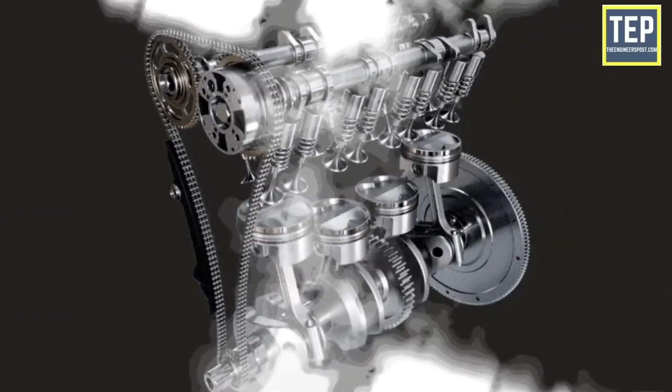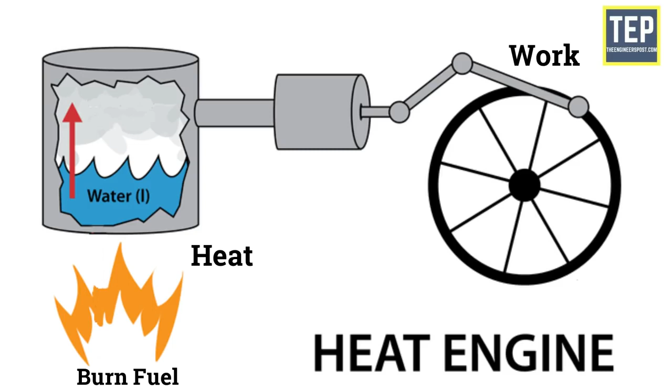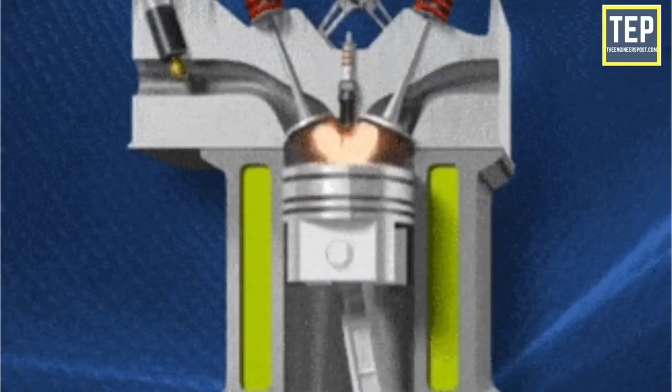An engine is a machine designed to convert one form of energy into mechanical energy. Heat engines burn fuel to create heat, which is then used to do work. It is a complex machine built to convert heat from burning gas into the force that turns the wheels. The chain of reactions that achieve that objective is set in motion by a spark, which ignites a mixture of

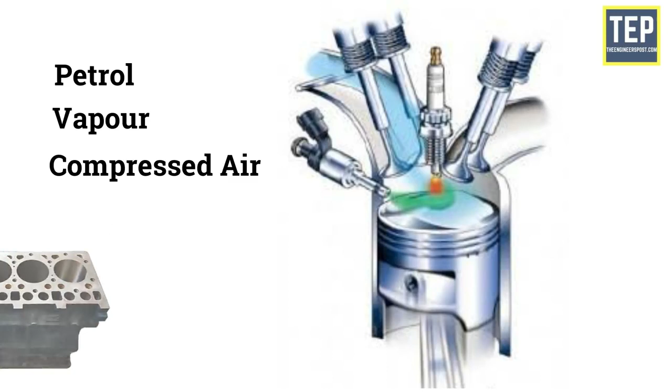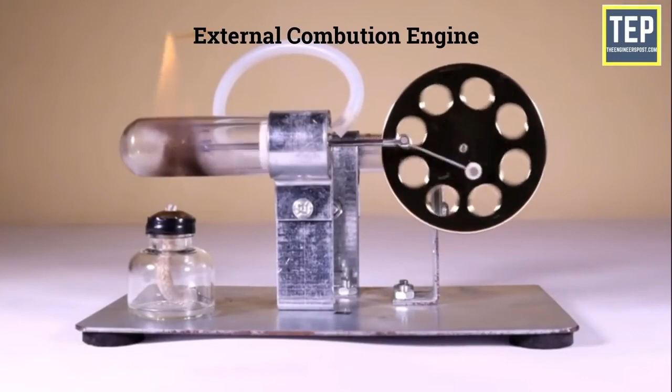petrol vapor and compressed air inside a momentarily sealed cylinder and causes it to burn rapidly. The engine has two types: one is the internal combustion engine, and another is the external combustion engine. The internal combustion engine is those heat engines that burn their fuel inside the engine cylinder. External combustion engines are those heat engines that burn their fuel outside the cylinder.

The engine is one of the most essential parts of the automobile industries, or we can also say that the engine is the heart of an automobile.

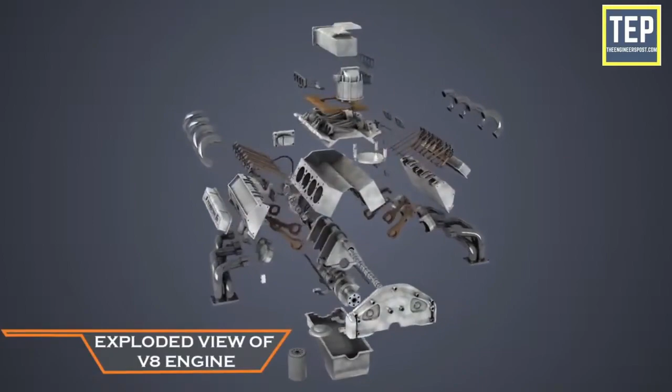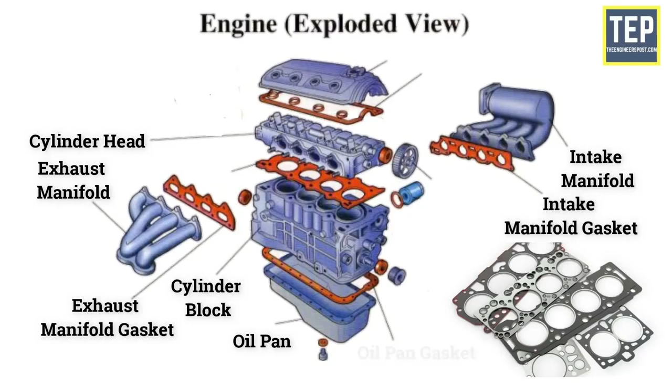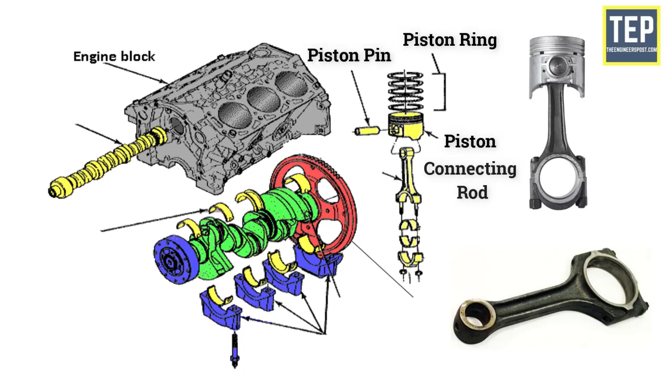The main parts of a car engine are cylinder block, cylinder head, oil pan, manifolds, gasket, and piston, piston ring, piston pin, connecting rod, crankshaft, camshaft, flywheels, rod bearing, main bearings, and bearing caps.

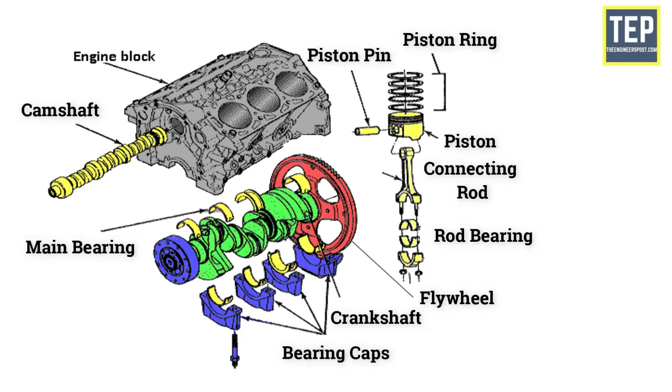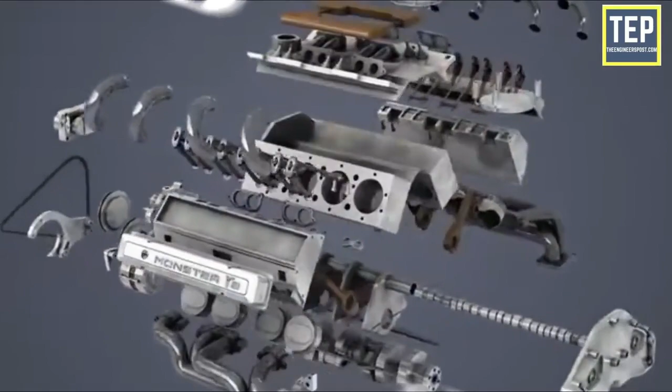Now let's take a look at each engine part in detail, starting with the cylinder block. It is the basic framework for the engine and one of the main parts of an engine. A cylinder block consists of three parts: the cylinder in which the piston slides up and down, the port or opening for the valves, and the passages for the flow of cooling water.

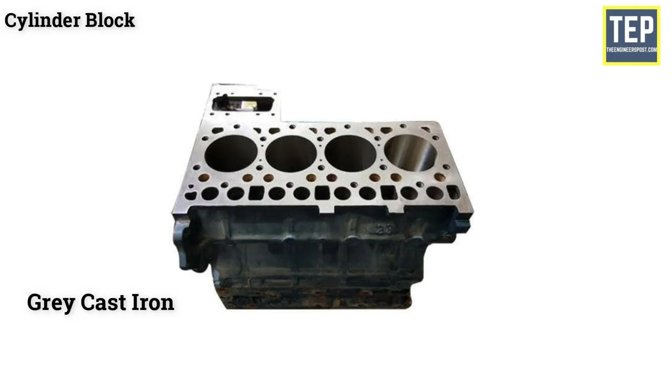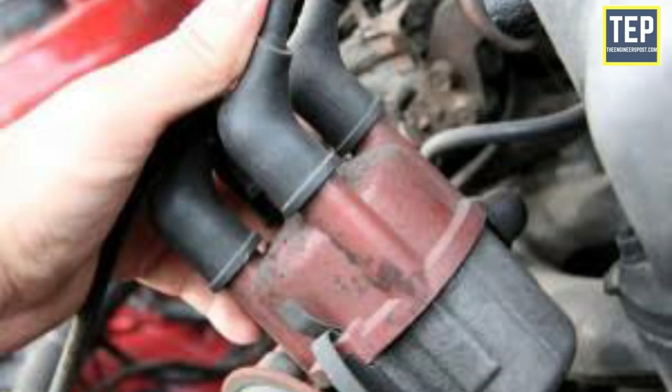The cylinder block is usually made of gray cast iron or aluminium and its alloys, while the crankcase is fixed to its bottom. Apart from these, other parts like timing gear, water pump, ignition distributor, flywheel, and fuel pump are also attached to it.

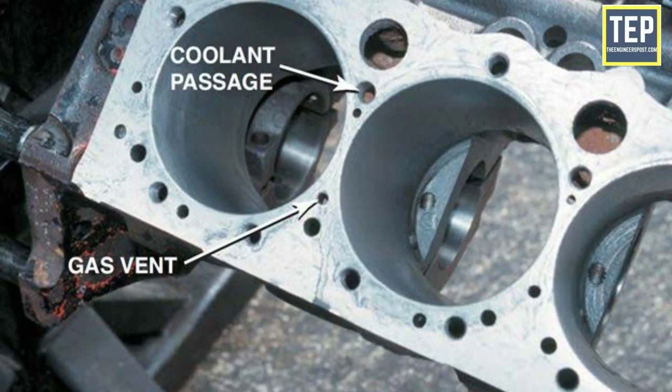Coolant passages are provided in the cylinder walls for the circulation of cooling water. The cylinder block also carries lubrication oil to various components through drilled passages, which are called oil galleries.

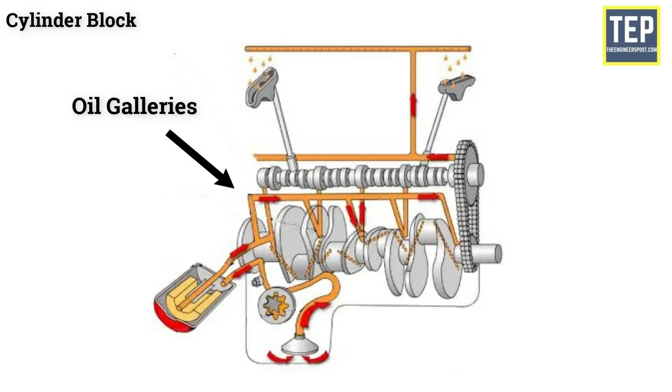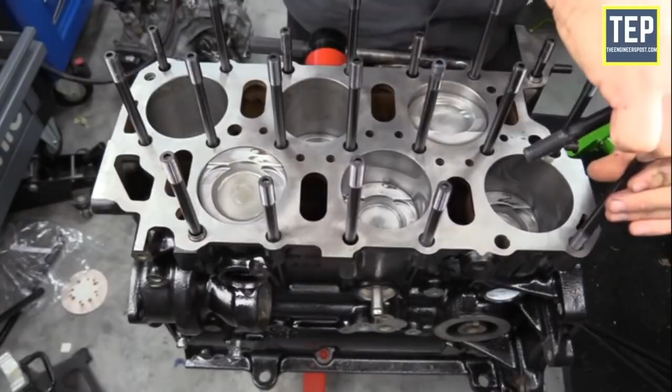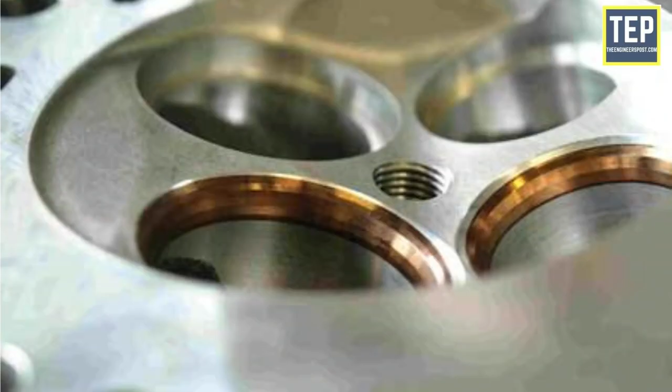The cylinder head is attached to the cylinder block using studs fixed to the block, with gaskets used to provide a tight leak-proof joint between the head and block. The cylinder head contains a combustion chamber above each cylinder, and it also contains valve guides, valve seats, ports, coolant jackets, and threaded holes for spark plugs. It incorporates passages for the flow of cooling water.

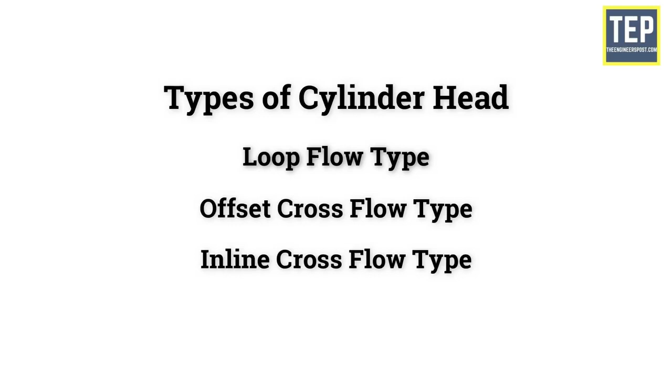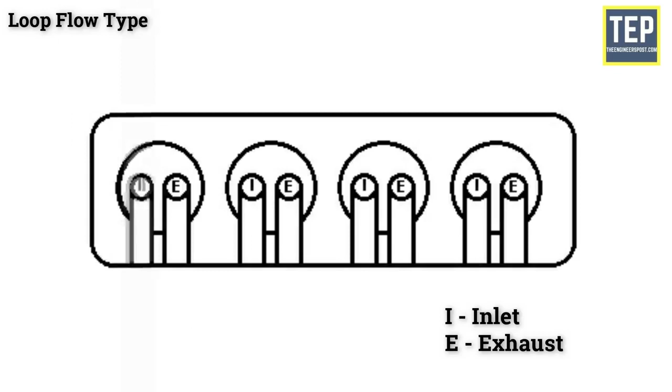There are three different types of cylinder heads available, depending upon the valve and port layout: loop flow type, offset cross flow type, and inline cross flow type. In the loop flow type, the inlet and exhaust manifolds are on the same side, which facilitates preheating of the intake air. In the offset cross flow type, the inlet and exhaust manifolds are placed on different sides of the cylinder head.

In the inline cross-flow type, the valves are positioned transversely and usually inclined to each other, while the inlet and exhaust manifolds are on different sides of the cylinder head. This arrangement gives better performance, but it is costlier.

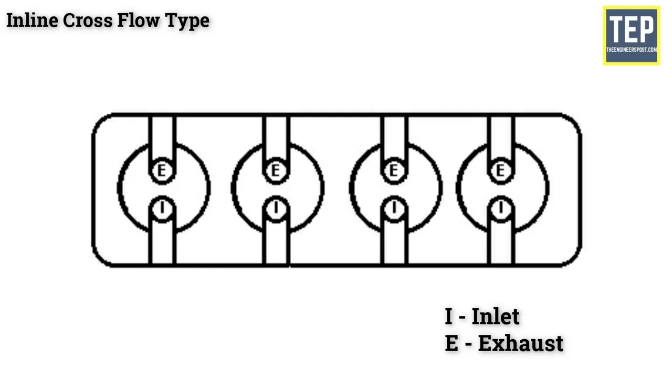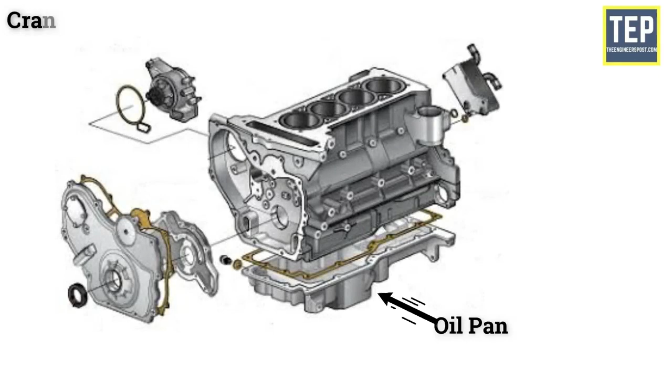Crankcase. The oil pan and the lower part of the cylinder block together are called the crankcase. It is the bottom portion of the cylinder block in which the crankshaft is fitted.

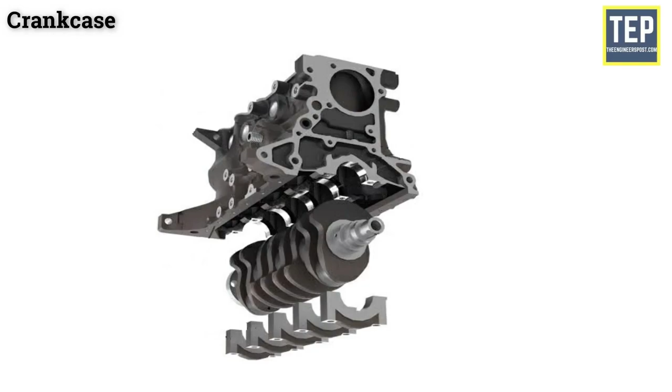This is a rigid construction made of gray cast iron or aluminium. Either it can be cast integrally with the block, or it can be cast separately and attached to the block with bolts. The crankcase is shaped simply like a box, having no bottom surface.

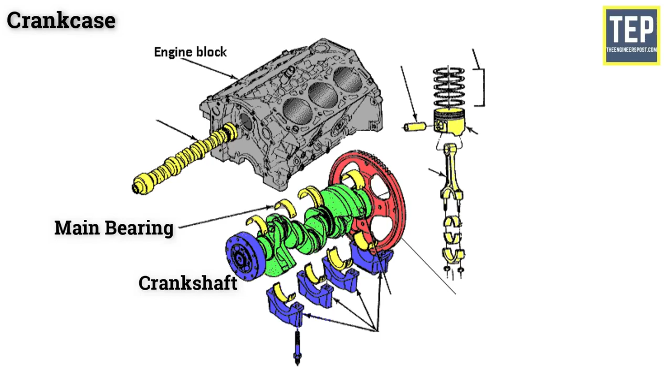The function of the crankcase is to provide support for the main journals and bearings of the crankshaft, rigidly maintaining the alignment of their axes of rotation under various engine loads.

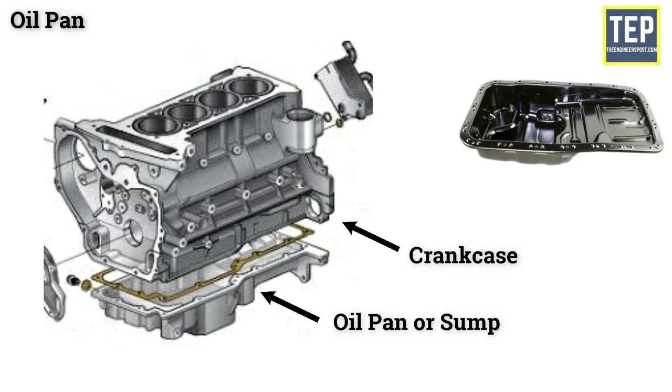Oil pan. The bottom half of the crankcase is called the oil pan or sump. It is attached to the crankcase through set screws and with a gasket to make the joint leak-proof.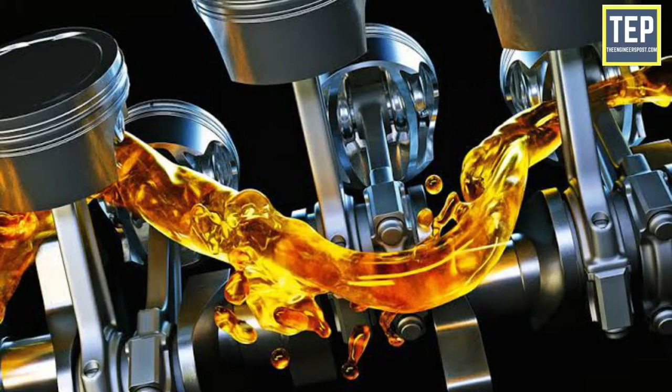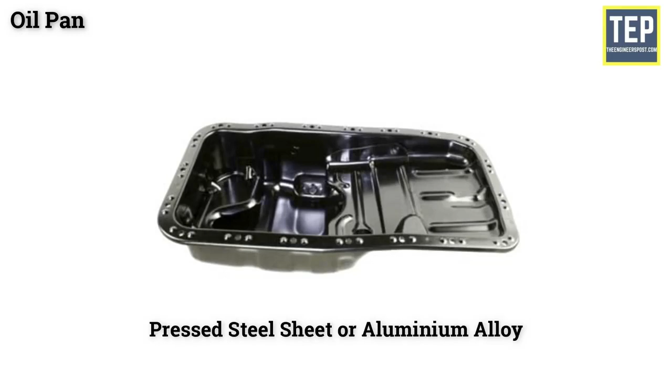The oil pan serves as a reservoir for the storage, cooling, and ventilation of engine lubricating oil. At the bottom of the oil sump, a drain plug is provided to drain out the dirty oil at the time of oil replacement. Generally, the sump is made of pressed steel sheet, or aluminium alloy casting is also used.

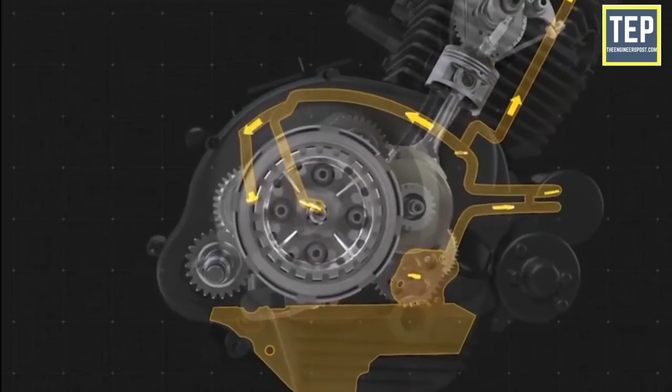The oil pump in the lubricating system draws oil from the oil pan and sends it to all working parts in the engine. The oil drains off and runs down into the pan. Thus, there is a constant circulation of oil between the pan and the working parts of the engine.

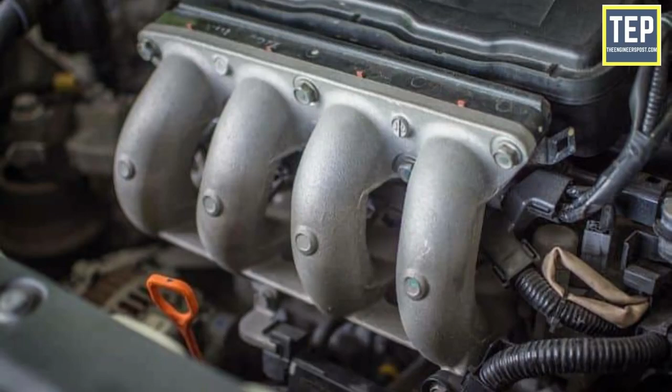Manifolds. There are separate sets of pipes attached to the cylinder head, which carries the air-fuel mixture and the exhaust gases. These are called manifolds. It is generally made of cast iron, so that it can withstand the high temperature of the exhaust gases.

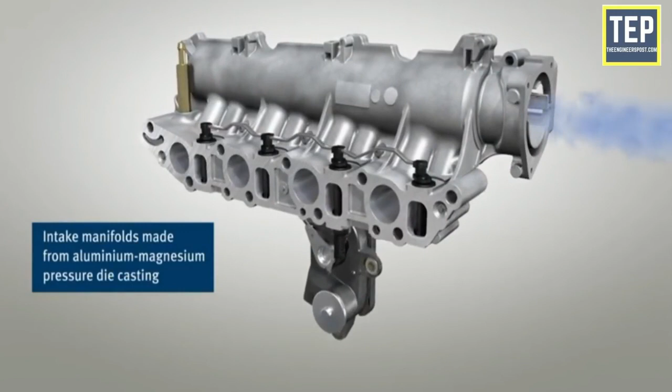The air goes into the air intake, travels through the throttle body, into the intake manifold, and from there it goes into the engine through the cylinder head. The inlet manifold carries the air-fuel mixture from the carburetor to the cylinders. The exhaust manifold is the set of pipes carrying exhaust gases from the cylinder head to the exhaust system.

Gaskets. Gaskets are used to provide a tight-fitting joint between two surfaces. Gaskets are found in the joint between the cylinder head and the cylinder block, between the crankcase and oil pan, and in between the cylinder block and manifold.

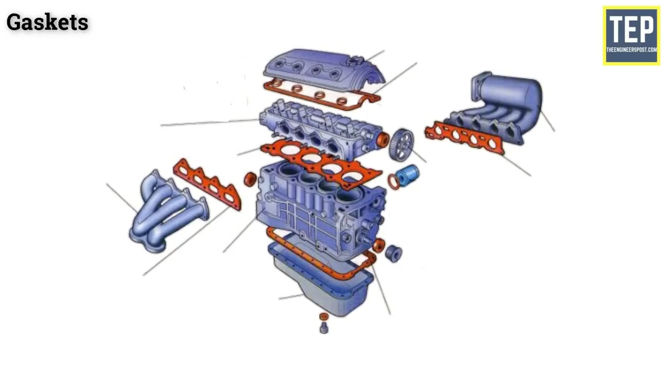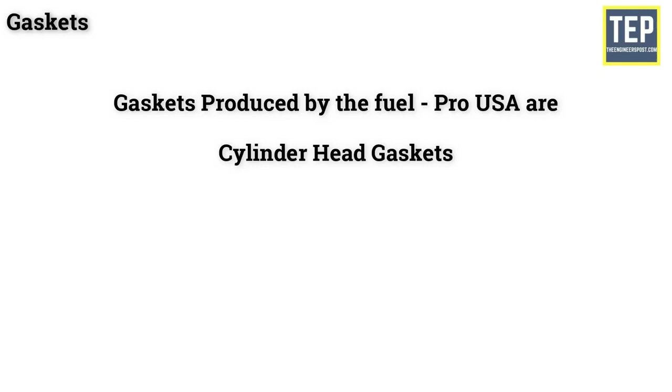Materials used for gaskets are cork, asbestos, rubber. Gaskets produced by the Fel-Pro USA are cylinder head gaskets, oil pan gaskets, manifold gaskets, and pump gaskets.

Cylinder liners. The cylindrical shaped liners are used to avoid the cylinder wear. It is one of the most important functional part to make up the interior of an engine. Cylinder liners can be replaced after they are worn out.

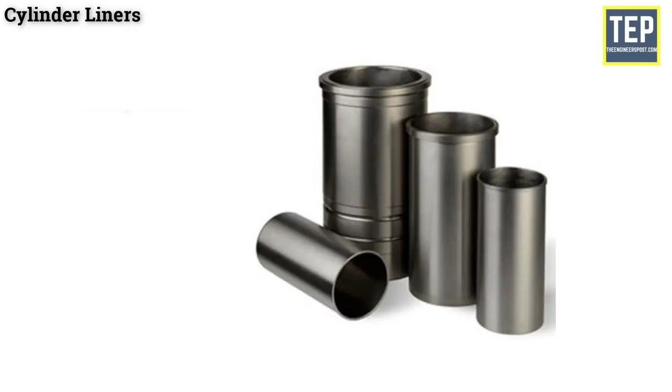These are made of special alloy iron, containing silicon, manganese, nickel, and chromium. Usually these are cast centrifugally. These liners resist wear and corrosion, and are the oil hardening type that offers considerably longer life for the engine.

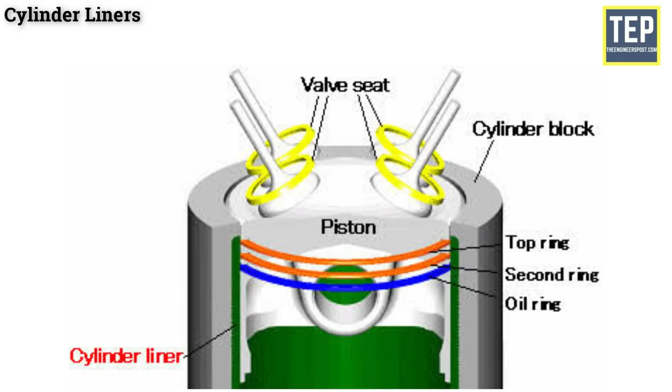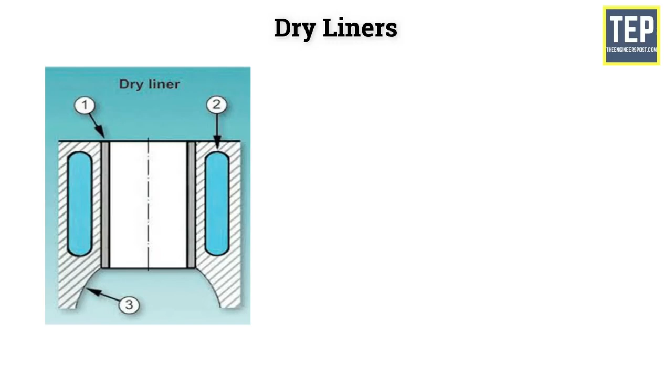There are two types of cylinder liners available. They are dry liners and wet liners. Dry liner is made in the shape of a barrel with a flange at the top, which keeps it into position. The entire outer surface bears against the cylinder block casting, and hence, these are machined accurately at both outer and inner faces.

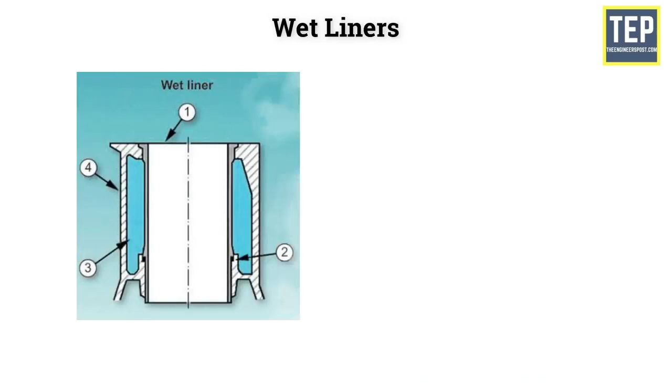Wet liners are in direct contact with the cooling water at their outer face. Because of this, these liners need not be machined very accurately at the outer surface. However, they are machined accurately at the inner surface.

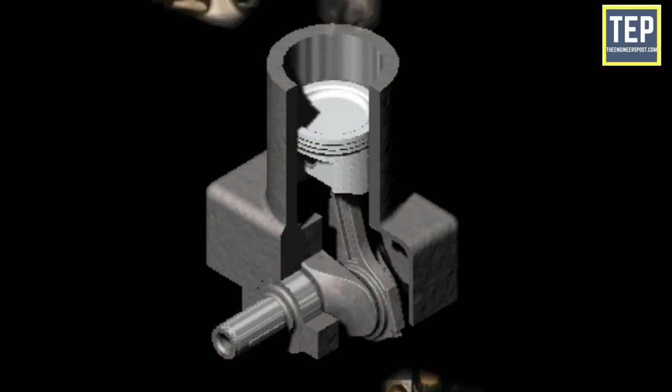Pistons. These are the most important engine parts compared to others. The piston is a cylindrical plug that moves up and down in the cylinder. It helps to convert pressure energy, obtained by the combustion of fuel, into useful mechanical power, and it transfers this power to the crankshaft through the connecting rod.

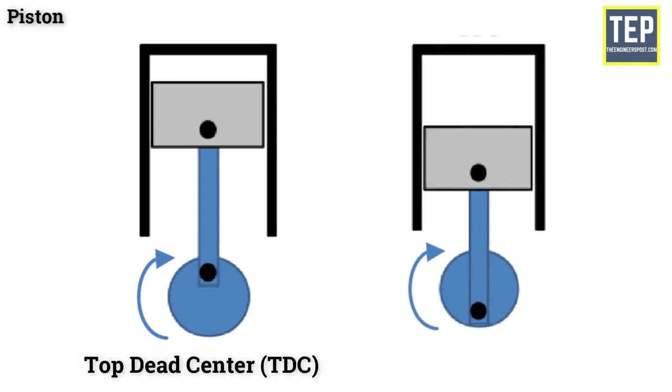The highest position the piston reaches in the cylinder is called the top dead center, and the lowest position it reaches is called the bottom dead center. It is provided with about 3 to 5 piston rings that provide a good seal between the cylinder wall and piston. The efficiency and economy of the engine primarily depend on the working of the piston.

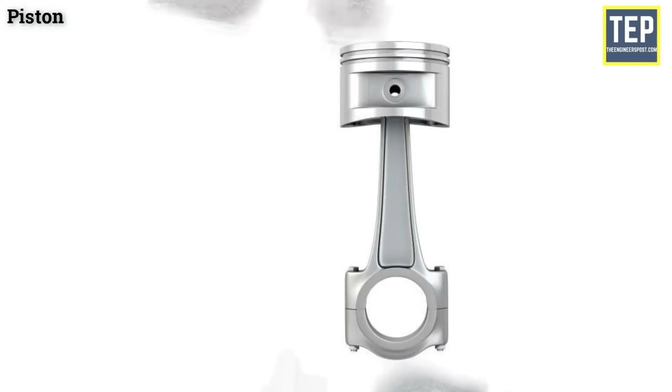The material used for the piston is mainly cast iron and aluminium alloy. It may be either cast or forged. The piston is usually smaller in diameter than the bore of the cylinder.

The space between the piston and the cylinder wall is called the piston clearance. This piston clearance provides a space for a layer of lubricant between the piston and cylinder wall to reduce friction. Generally, piston clearance is 0.025 mm to 0.100 mm.

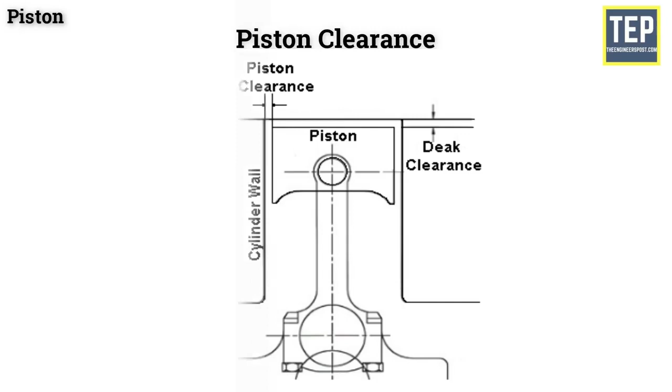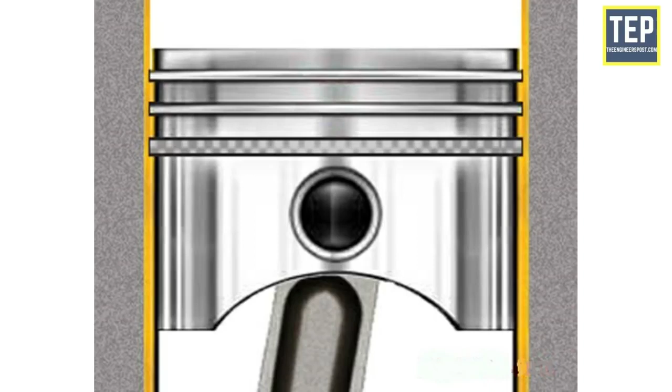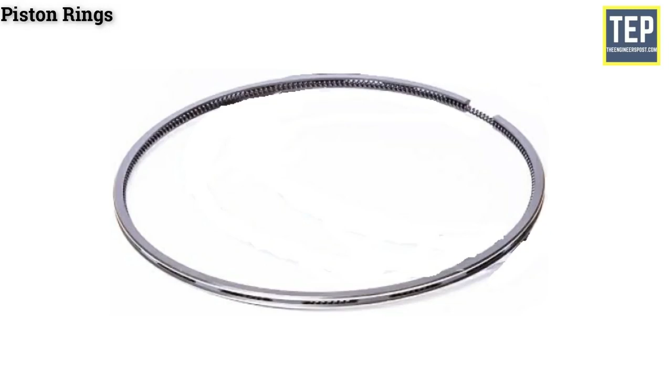Piston rings are fitted into the grooves of the piston to maintain a good seal between the piston and the cylinder wall. Their function is to seal the high-pressure gases from the combustion chamber from entering the crankcase. The material generally used is fine-grained alloy cast iron containing silicon and manganese, which has good heat and wear-resisting qualities.

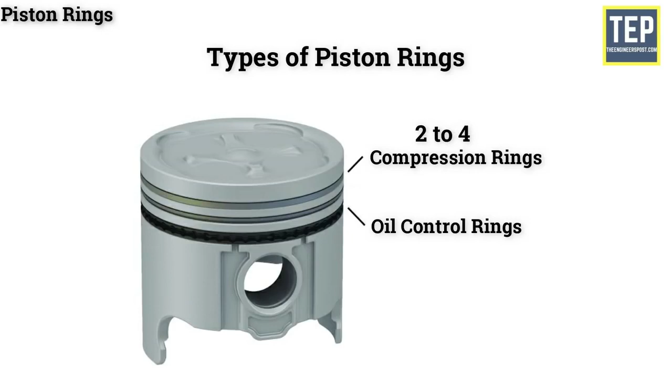Mainly there are two types of piston rings available: compression rings and oil control rings. The number of piston rings used is about 2 to 4 compression rings and 1 to 2 oil control rings.

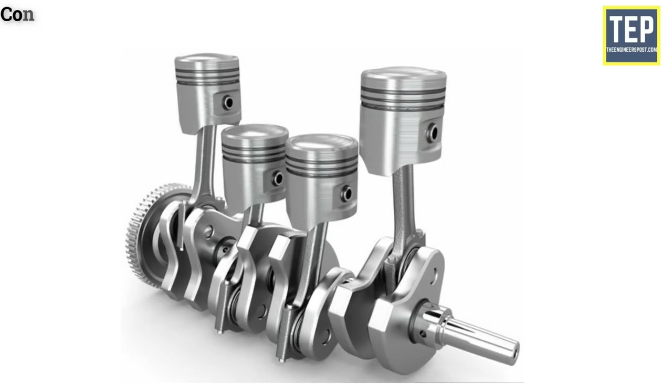Connecting rod. It is fitted in between the piston and crankshaft. The main function of the connecting rod is to convert the reciprocating motion of the piston into the rotary motion of the crankshaft.

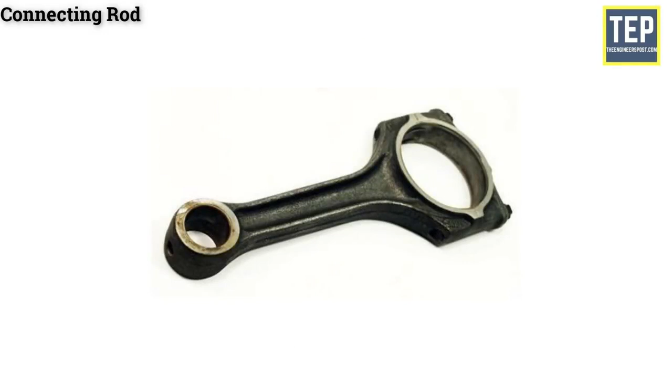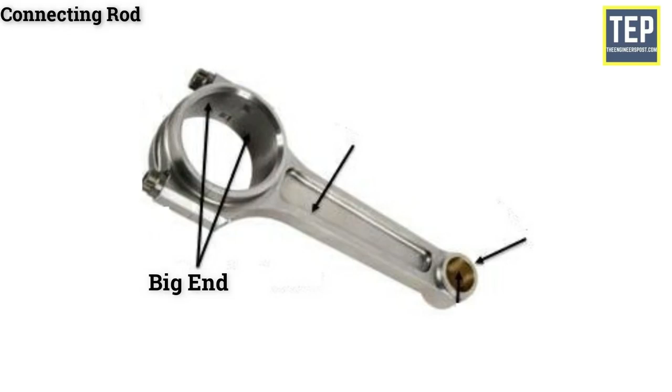The connecting rod in an IC engine must be light and strong enough to withstand stress and twisting forces. It usually has an I-beam cross-section and is made of alloy steel or duralumin by drop forging. The small end has either a solid eye, used to connect the piston by the piston pin. The big end is always split and is used to connect the crank pin of the crankshaft.

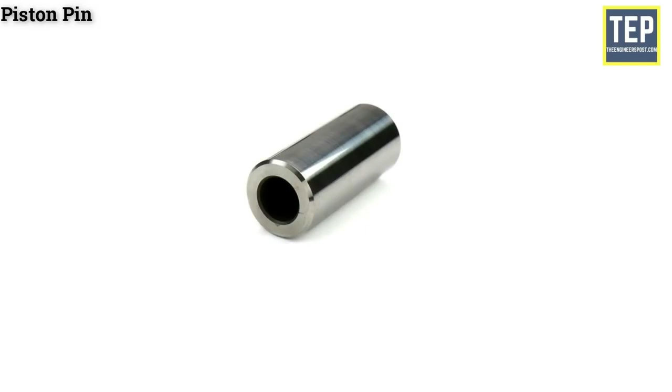Piston pin, also called wrist pin or gudgeon pin, is used for connecting the small end of the connecting rod and the piston. It is made hollow to reduce weight, and made from case-hardened steel.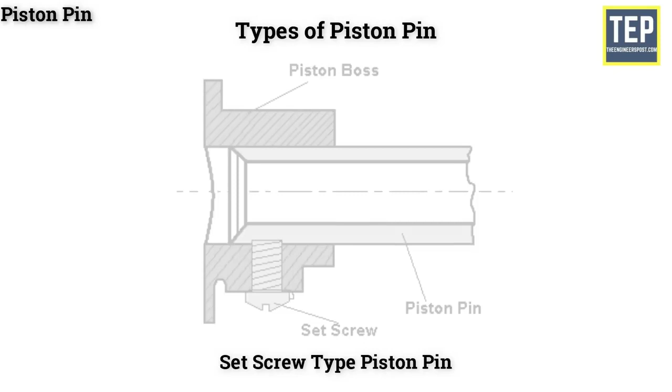Mainly there are 3 types of piston pins available. The set screw type piston pin is fastened to the piston by a set screw. The semi-floating piston pin is fastened to the connecting rod with a clamp screw.

Fully floating piston pin: the pin floats in both the piston bosses and the small end of the connecting rod. It is prevented from coming in contact with the cylinder wall by 2 circlips.

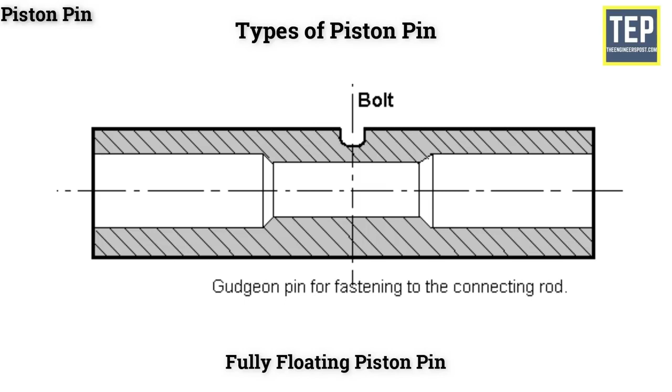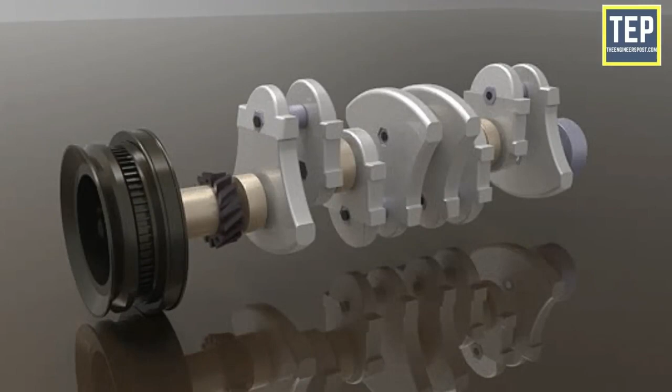Crankshaft. The crankshaft is the engine component from which power is taken. It is one of the main power transmission sources in all engine parts. It is the first part of the power transmission system, in which the reciprocating motion of the piston is converted into rotating motion with the help of the connecting rod.

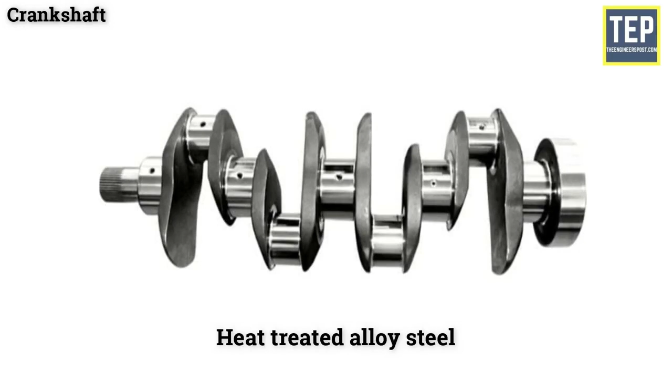The crankshaft is made of casting or forging of heat-treated alloy steel and is machined. A crankshaft consists of crank pins, webs, balancing weight and main journals, and oil holes.

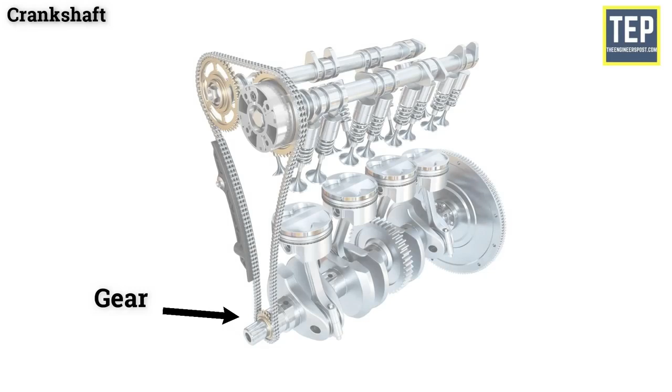The front end of the crankshaft carries 3 devices: a gear that drives the camshaft, the vibration damper to control torsional vibration, and the fan belt pulley. This pulley drives the engine fan, water pump, and generator with a V-belt.

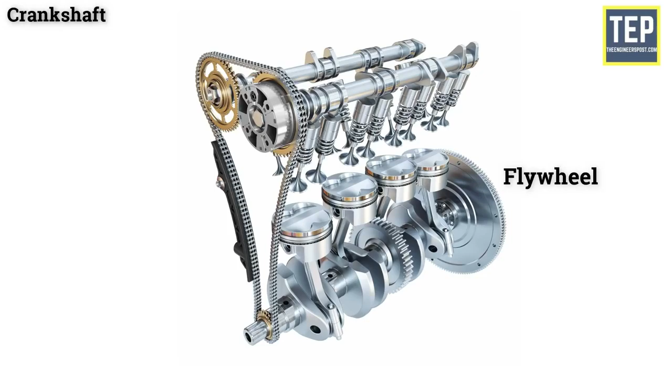The rear end of the crankshaft carries the flywheel. The flywheel tends to keep the crankshaft running at a constant speed.

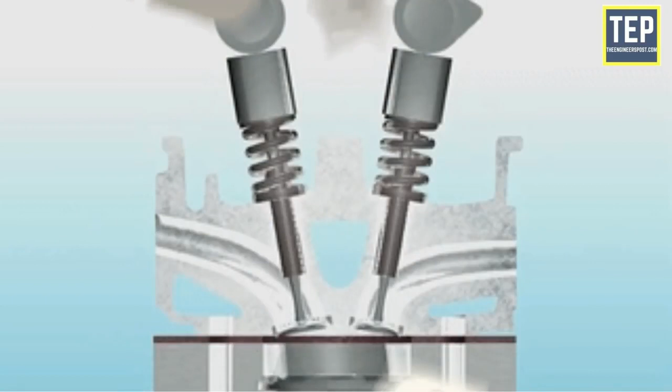Camshaft. A camshaft is a shaft on which cams are mounted. A cam is a device that changes the rotary motion of the camshaft into the linear motion of the follower. It is responsible for the opening of the valves. A camshaft has several cams along its length, 2 cams for each cylinder, one to operate the inlet valve and the other the exhaust valve.

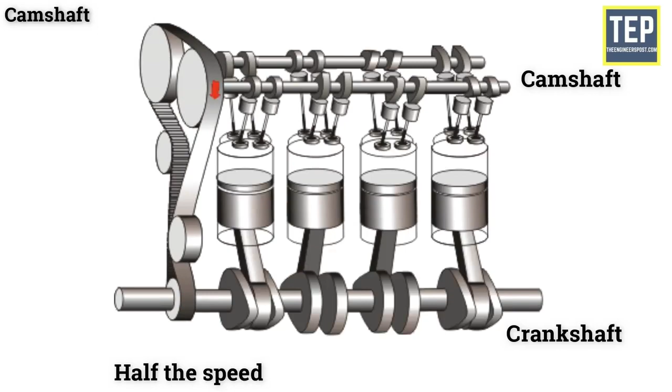The camshaft is driven by the crankshaft, and has twice as many teeth on its gear as the gear on the crankshaft, so it turns at half the speed of the crankshaft. The camshaft is made from forged alloy steel. There are 3 types of camshaft drive mechanisms: gear drive, chain drive, and belt drive.

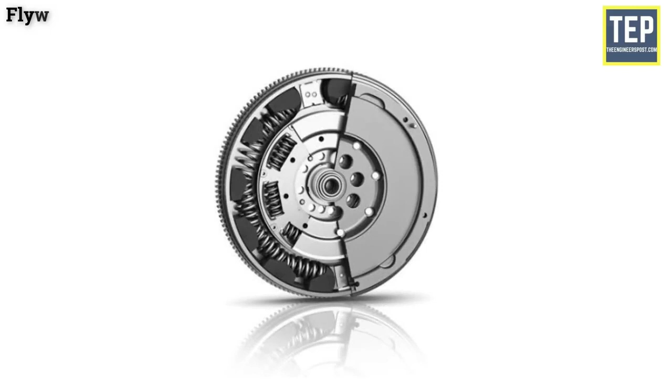Flywheel. The flywheel is used in the transmission system of a vehicle. A flywheel is a heavy steel wheel attached to the rear end of the crankshaft. The size of the flywheel depends upon the number of cylinders and the construction of the engine. The inertia of the flywheel tends to keep the running of the crankshaft at a constant speed.

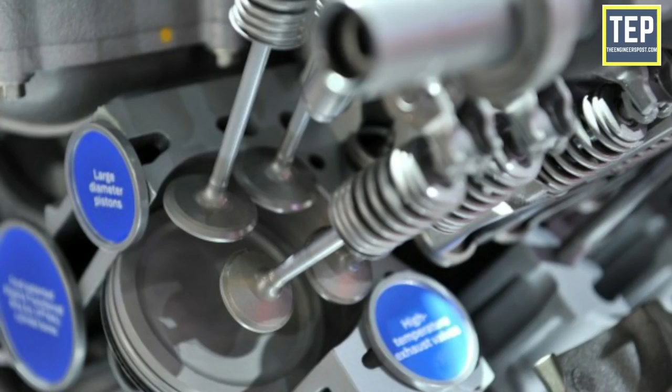Engine valves. These are essential to control the timing of air-fuel mixture entry into the cylinder, and combustion products out of the cylinders. Engine valves are located at the inlet and outlet openings of the engine cylinder. The valves fit on the valve seats in their closed position.